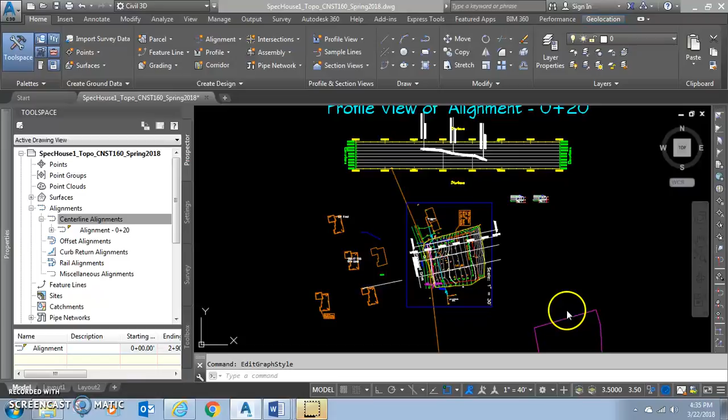Okay. So we have our 0 plus 20 profile created. We'll do our 0 plus 50 next. So the first thing we're going to do is select alignment, create an alignment from an object, and select the polyline. So when I select the polyline, you can see this arrow that shows up right in this location right here. And you can see how the arrow is pointing from right to left. But we want the profile to match our plan view.

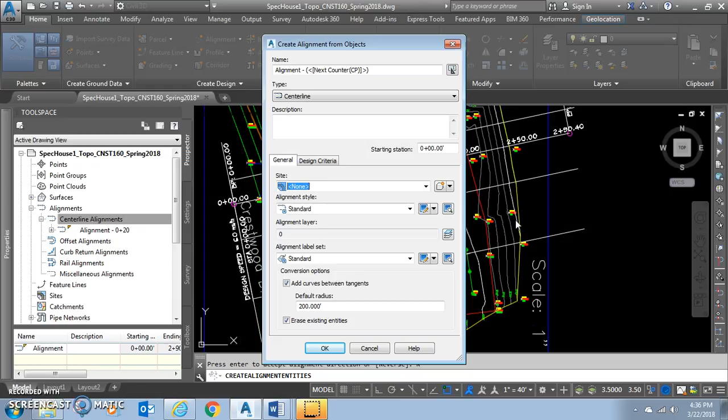So what I'm going to do is hit R for reverse, enter, and that's going to reverse that alignment so that it goes, you can see the arrow, left to right. So when I create my profile, it matches. I'm going to call this 0 plus 50. Centerline alignment, none of this changes. Click OK. Now if you look in here, you can see our centerline alignments. We just created another one.

So again, that process, I'll create the 100 alignment, create an alignment from objects, select a polyline. It has to be a polyline. Enter, hit R to reverse it, again to make it go left to right. And this is at 100 feet, so that station is 1 plus 00. So we created 3 alignments.

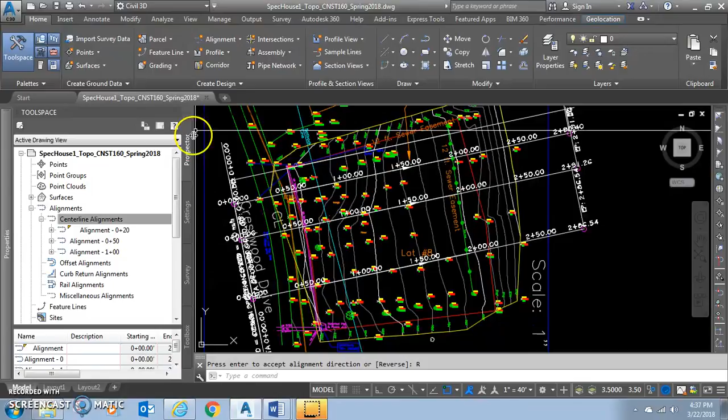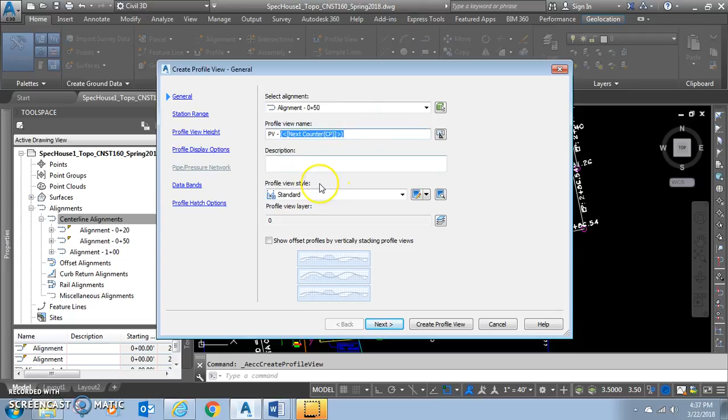Then we're going to take our profile, create a surface profile, and this time we want to create it from the 0 plus 50 alignment. Still using existing grade as a surface. I'm going to go to draw in profile. I'm going to call this 0 plus 50. Make sure we can keep these straight. Again, I'm just going to go pretty much through next, next, next.

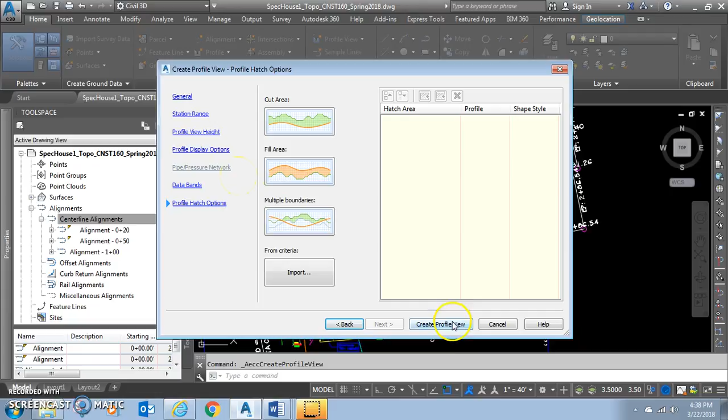If we had an existing surface and new surface, you could create these hatch areas that would show cut and fill between the two, but we only have the one surface. So I'm just going to click Create Profile View here, and I'll set this one right above the other one. So we have 0 plus 50. Does that make sense?

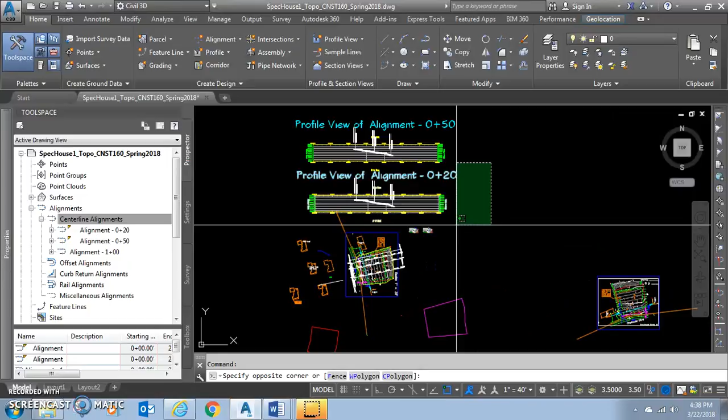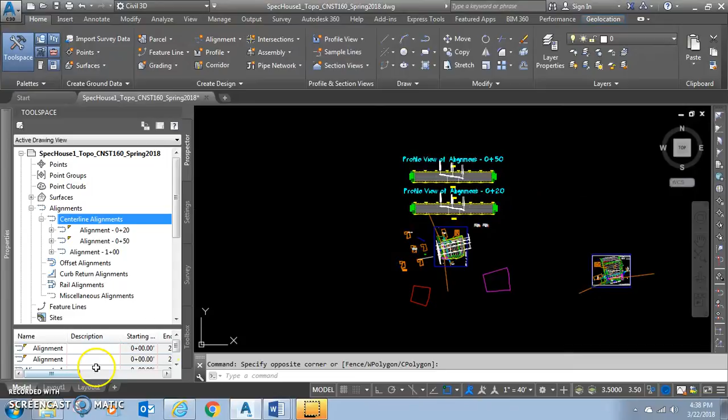No, they were 30 feet apart. So the first one was 20 feet. Then the next one was 30 feet from the 20, which would be 0 plus 50, because 20 plus 30 is 50 feet. And then it was 50 feet from the 50 foot. So it was 0 plus 20, 0 plus 50, and then 1 plus 00. Yeah, there was a 30-foot offset, but it was 30 feet from the 20, which makes it 50 feet from the 0. So, well, it's 3 minutes now. So it took us less than 3 minutes there to create that profile.

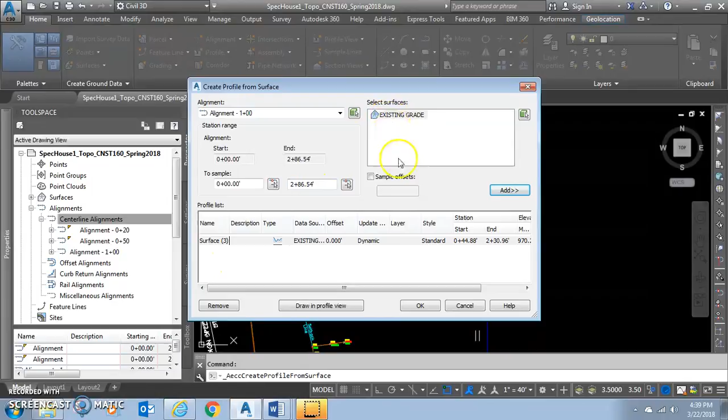We'll do another one right quick here. Profile, create a surface profile. This time we want to use our 1 plus 00. Again, we're using existing grade. Had we had another surface here, you could add both of them to show the clash for cut fill. Draw in profile view. This is PV 1 plus 00. PV is profile view. Next, next, next.

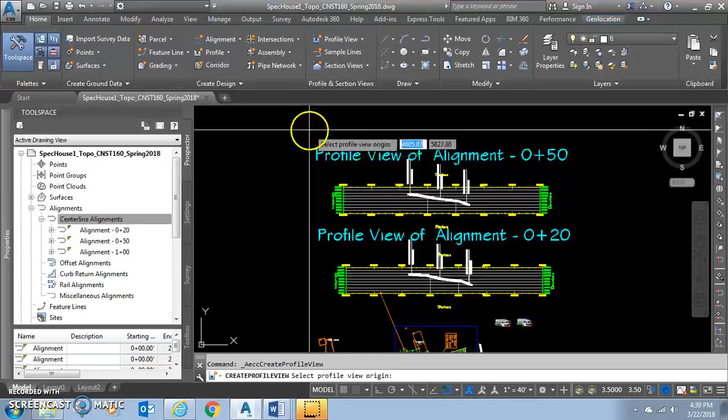Create profile view. And when I select, I'm just going to drag this into place here. That's my 1 plus 00 profile view. So you can adjust the text sizes to match your drawing, but in less than 4 minutes here, we just created 3 profiles. They wouldn't take an astronomical amount of time by hand, but this is a relatively small site.

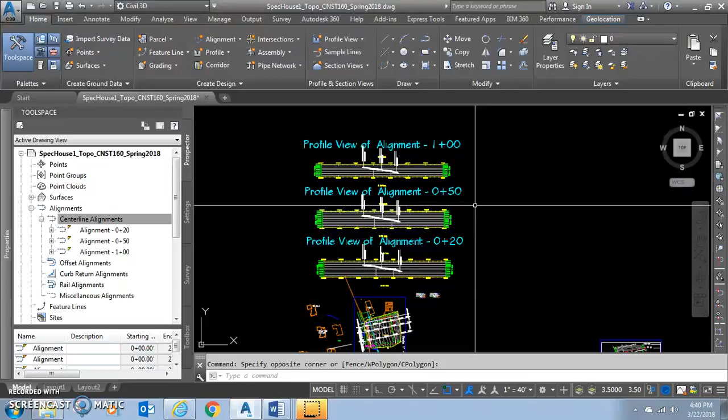AutoCAD will create these just as fast if you create a profile through the whole length of campus. And you can imagine how much time that would take to plot by hand. And this does it in a matter of seconds along any alignment that you create. The alignments also don't have to be a straight line. So you could do an alignment along the back loop of campus, for example, the road. And think of if you were trying to plot a curved alignment by hand, that'd be kind of a challenging thing to plot. But I'm gonna pull